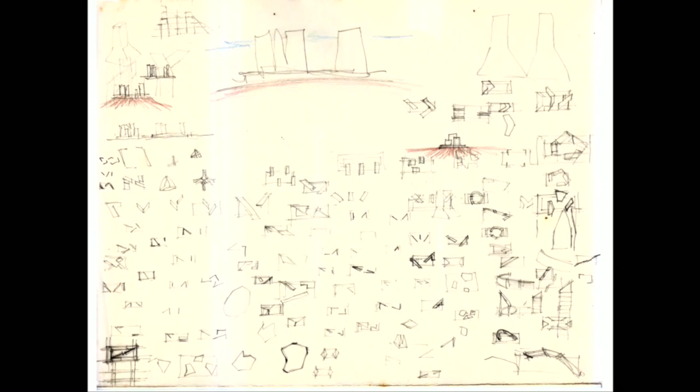And then there arises the opportunity for serenity to invade, and silence, the silence of a breeze, the silence of a deep sleep, the silence of a space. My work used to confuse me, but it was important to be confused. I sense in confusion lies the seeds of discovery of truth.

I drink from the broth of 7 or 10,000 years of my history, and I feel alive again. The myth, the mystery, the mysticism, the emotion, the philosophy, the chaos, the romance. Yes, I'm in love with the Bengali way of life. Come away with me for an hour of the Sarod and you will know what I mean. But ask me not of my work, for I create for the love of art. And ask me not of the present or the future, I know neither.

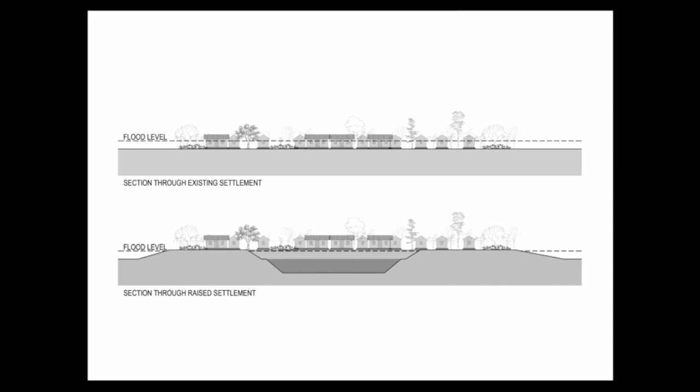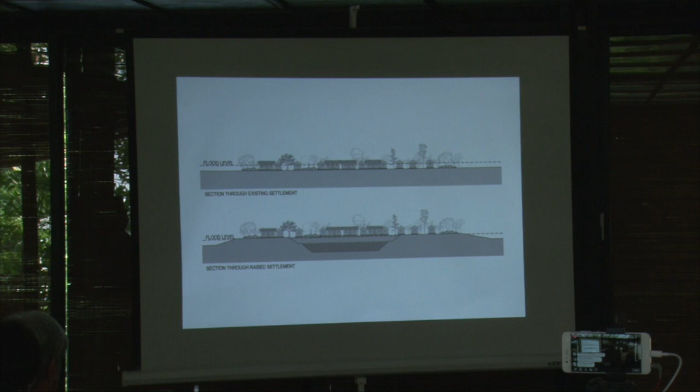The problem is these rivers are quite ferocious during the rainy season. There's a lot of water flow, and quite a lot of speed with which the water comes, so how to make something which will last and not break away very easily. So we looked at the patterns of the various sandbanks that form, and they form comet shapes because when the water comes like this, as they leave, they leave a tail.

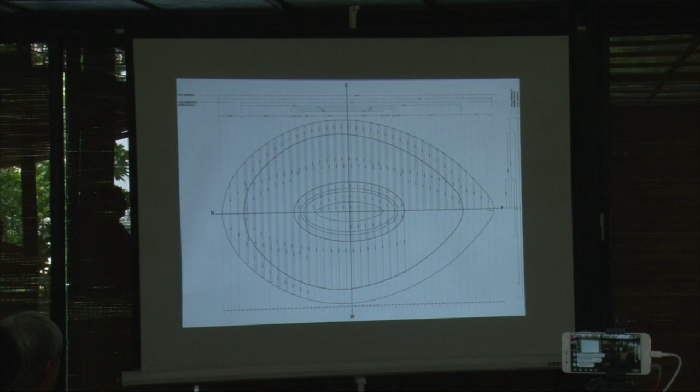So this was our proposal for the island, a teardrop-shaped island from where the water will pass like this and leave. And in the middle of the island, there would be a pond which would hold fresh water. This is basically what we came out with. We would dig here, and this would be used to raise this part and also form a sloping side, so the water would pass like this. Now it's very difficult to make a hydraulic model of this, so it was based on local knowledge and a lot of our observations from the various visits that we did.

And this is what a typical plinth would look like in the landscape in the dry season. So it was, as you say, a participatory kind of project. It was self-built, and it was also food for work, in the sense the people whose homes would be moved up onto the raised area, they are the ones who worked on the plinth itself, and they were paid to do so. And it was a very basic way of doing it, as you can see.

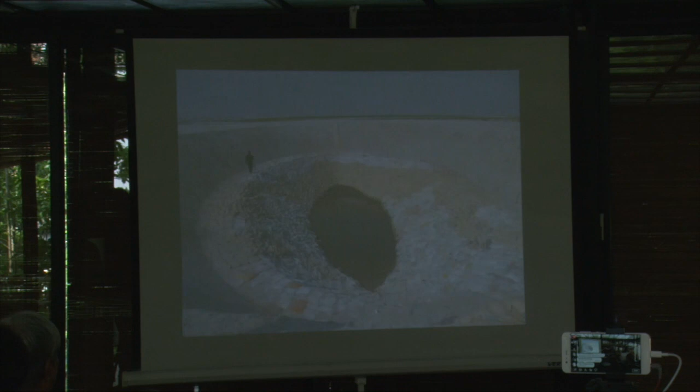So that's one of our architects working there with the villagers, giving out layouts. And then this is the pond which is being dug, which again helps to raise the main island, if you will. And then it starts to form, and green returns, and eventually life returns. A very simple solution for a very, very basic budget that we had.

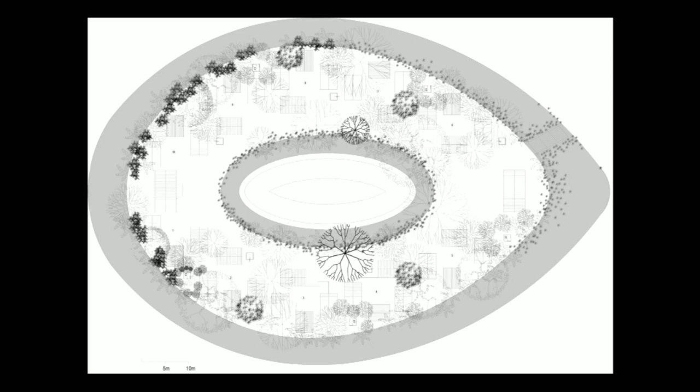Now, for the placing of the houses themselves, we did not design the houses, because the existing houses would be moved up onto this raised plinth. But we sort of mapped out how the houses could be placed, and this was based on the pattern of the placing of houses in a village. As you can see, instead of a walkway, there are courtyards which connect to another courtyard and then walk into another courtyard, and that's what we did.

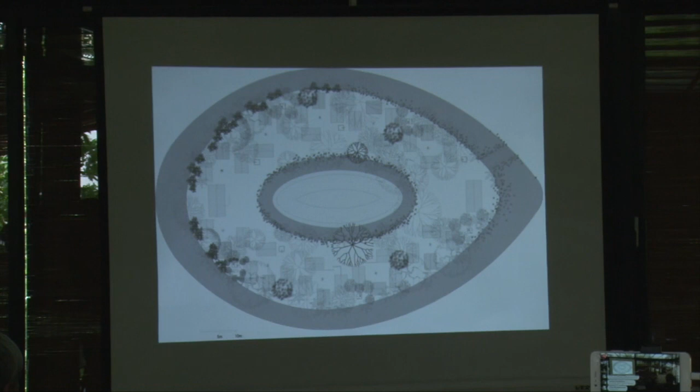And we allowed the villagers to not follow our drawing. But what was interesting, most of the time they did follow the drawing, and they said, yes, but we would like to move this house a little bit this way to get a little bit more breeze, etc. So it was, again, quite an interactive process from which, of course, we learned quite a lot.

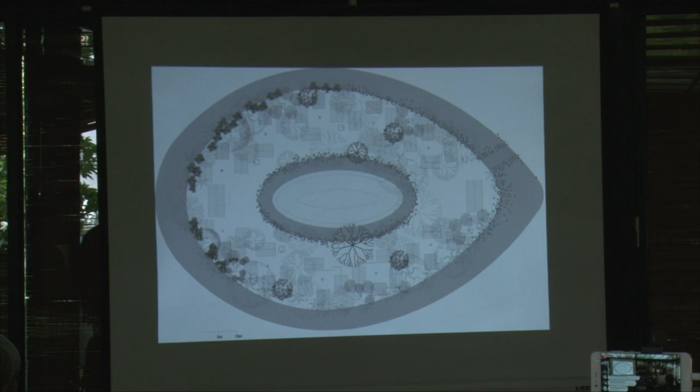And this is what it looks like in reality. So in the rainy season, you would see that all of it would be water, and this would be like an island. This is what it is, the life on the settlement.

So all around, a fierce flood is flowing, but in the center you have clean water which is harvested from the rain, and this, of course, is used for various purposes.

This is a project from 1999, 2000. This is a building I did for my mother's family. I designed and constructed it. The entire building is constructed by me, in the sense I got very much involved in the construction to understand really how it is done in a country like Bangladesh.

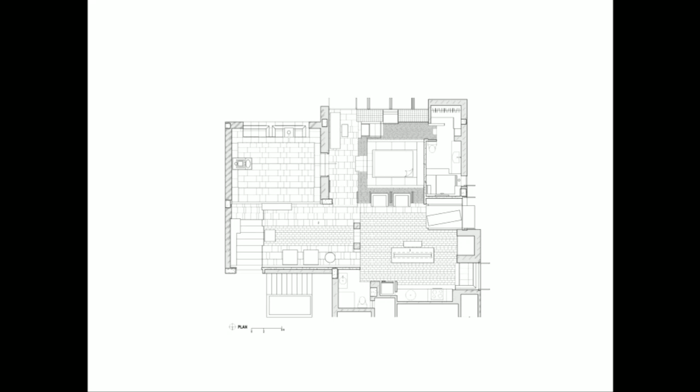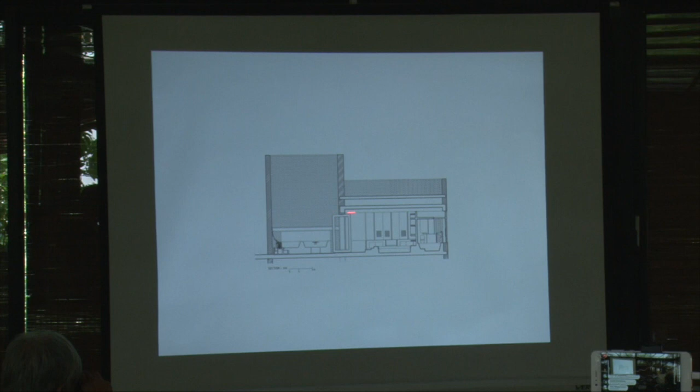But on top of it, there's a little apartment which is like a pavilion. It's open all around. It's a very small apartment. It's divided into 4 spaces. This is the courtyard, a sleeping area. This is a sitting area, and this is a dining area. And the courtyard is a tall kind of a volume. So the air from the surrounding area is drawn up like a chimney or stack effect.

This is the courtyard. Now, this is a very personal project. This is where we live. And so the detailing and the materials and the way this came about is a very personal statement, if you will. But most of the material here is recycled. For example, the stone that you see comes from a project 10 years ago. These are all reject pieces. They were lying in a warehouse, and they were used in various ways.

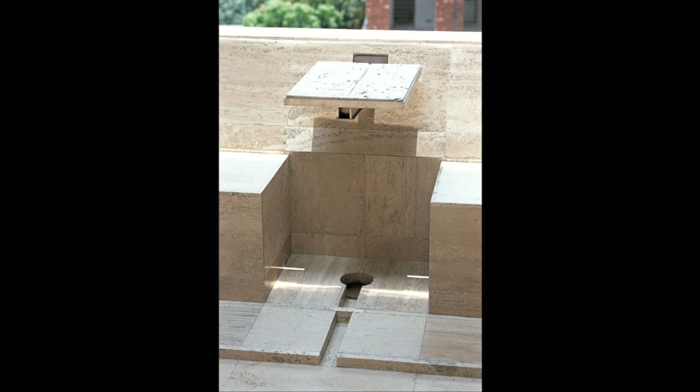So the roof of the courtyard. And then, of course, the living spaces can be darker, and what is important in a country like Bangladesh, in the tropical kind of weather, is cross ventilation, not just ventilation, but cross ventilation, so that the air is allowed to move in and out. So that is how this works. In the monsoon, for example.

Now, all the bricks that you see come from the old part of the city where they're breaking down old buildings. These are about 150-year-old bricks, and these were used in this project. So even the concrete formwork was made from the wood salvaged from the box in which the elevator of the building came. And so the various channels take the rainwater away into different areas and eventually out.

So because these were reject pieces, there were various sizes. So for example, these are larger sizes, these are smaller sizes. So every day my work was to set up these, and then the stone person would begin to lay them. The sleeping area.

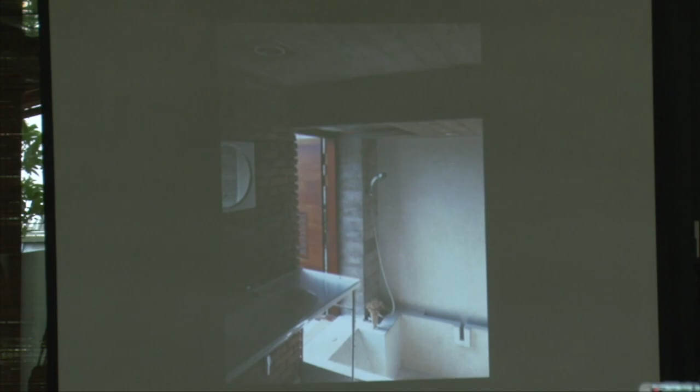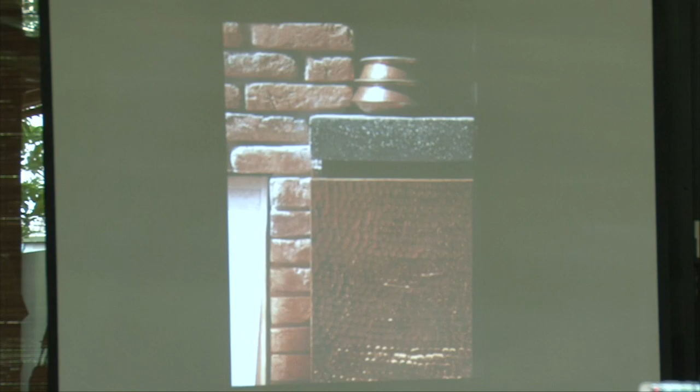Traditional copper work in the kitchen. Traditional broken china pieces in the bath area. And all, of course, naturally ventilated and naturally lit. Everything in this house, including doorknobs, hinges, everything is handmade. So various kinds of material, as I said, copper, hand-worked copper, teak. This teak comes from Chittagong, which is south of the country, and also from Burma. Concrete. So stone and the other materials.

These are the shapes, sizes we got. These are the ways we could sort of set them. We also got very thin pieces. And this is what it is at night.

In 1997, we won a national competition to design the Museum of Independence, myself and my former partner, Marina Tabassum. We worked on this project for, as you can see, quite a big part of our life actually. The reason being it's a government project and it went on and on and on. But the location of the project used to be a prominent race course. And then later during the Second World War, it was more planted, and there were other structures which came up.

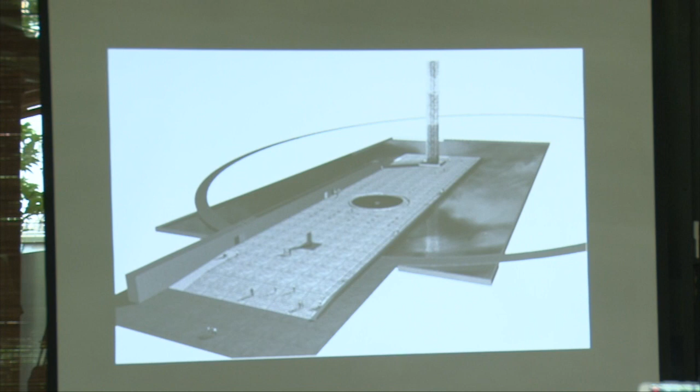There was a need for a museum and other ancillary facilities. One of the winning ideas was to have all the entire facilities below ground, so that we could preserve the horizontal sort of green character of the park. And the roof of the museum then became a public plaza, which could also hold the story of the Liberation War. Now, you might know that in 1971, Bangladesh became free from Pakistan after a 9-month-long guerrilla kind of warfare.

So people, ordinary people, farmers, people in the villages, in the cities, they fought against a fully equipped army present in the country. There are details on the internet also you can check. It was a very horrifying event. So to mark this, the project was initiated by the government. On the plaza itself, the first point is where the father of the nation gave his famous speech.

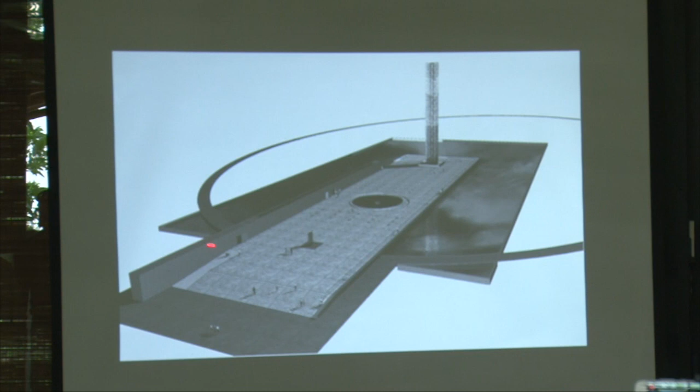And as you move towards the main monument, you encounter a very shallow pool of water with a hole in the center. It is like a black hole which draws in itself the water, and this water falls into the center of the museum below, which is the heart of the museum. So this represents the silent bearing of torture and rape and genocide by the people during those horrifying 9 months. And the only other element is a long wall which guides the visitor towards the monument itself, and this wall holds the ramp which takes the visitors below ground.

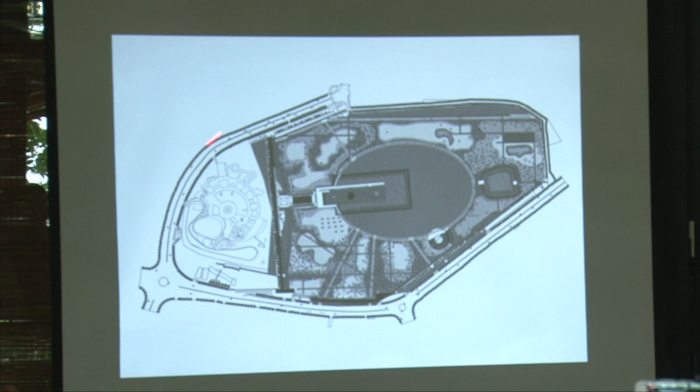This is what it is in the city. As you can see, it's a very dense city, and our idea, of course, was to preserve the openness as much as possible. So the only thing that is there is a large public plaza above ground. Again, the entire 67 acres of land is green, and just this part is the plaza area, and beneath it, the museum itself. The museum is again very simply lit. At the heart of it is a kind of rotunda space which has no display, and in this falls the water from above.

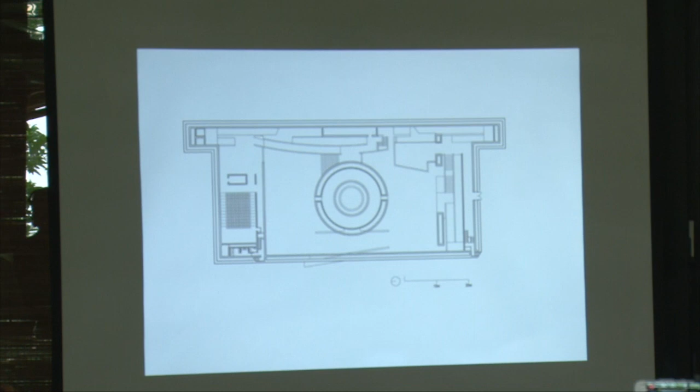Now I don't know how many students there are, but I'm showing this slide to say, well, this is my thesis project in the final year, and that is what was built in the museum. So as you can see, this was again in the center. I was working on this circle which brings the entire world together, and an open space where everybody could come. This is a cultural center, and here again this becomes repeated.

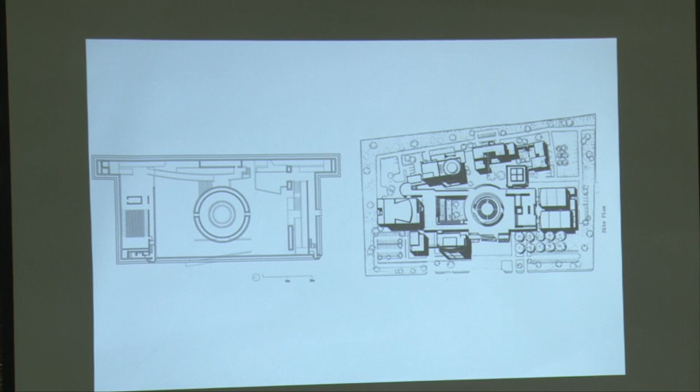And what is to say for students is really whatever exercises you do in whichever year, it really stays with you. So I guess one needs to be quite careful and invest a lot of time and energy into each and every one of those projects that you do, even as a student, because they're with you for the rest of your life.

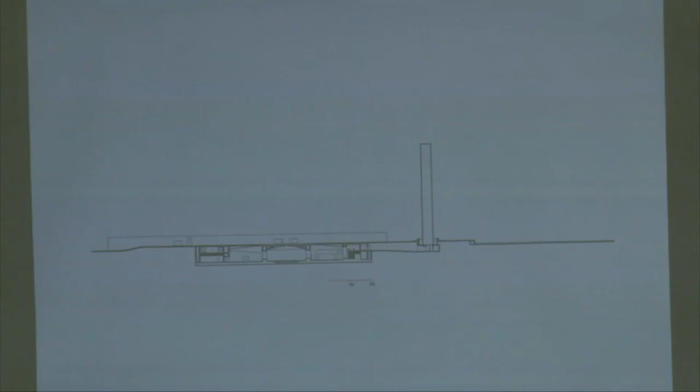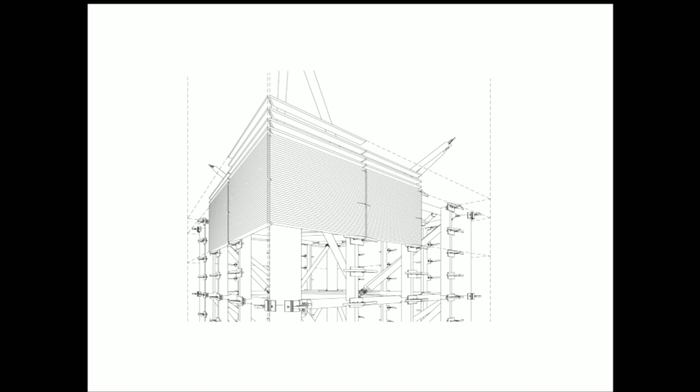The glass is not set like this, as you ordinarily see. It is set like this, which means the property of refraction is used as opposed to reflection. So it is stacked glass, 19 mil by 75, formed into prefab panels, which goes into this vertical space frame. And this, of course, harkens back to the thousands of years of our heritage of laying brick one above the other. And so the staggered glass has a certain materiality to it, a certain strength to it, and that is what we were interested in.

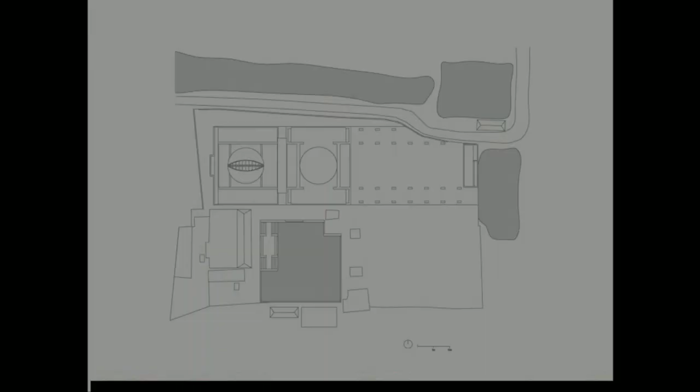The mosque is in the port city of Chittagong. The sponsors of the mosque wanted to build it and give it to the community. For us, it was important to not look at the mosque only as a religious space, but more as a spiritual space, and to think if it could also become a kind of place where the community can gather. So it essentially consists of two simple volumes, two cuboid volumes, one the mosque proper, and the other one as the courtyard.

So the courtyard is again given a form, so it is a kind of reception volume for the main mosque itself. This is the section to which I will come back later. So it is in the peri-urban area, and it connects both communities, the urban communities as well as somewhat rural communities.

And the front block, which is the courtyard, links the nature, the horizontality, with the vertical. And the horizontal represents our life on earth, our connection to nature, to other people, and this as spiritual, our connection to Zenith. So everywhere there's connection to nature, as I said, and views of it, views to the community, to the surrounding areas.

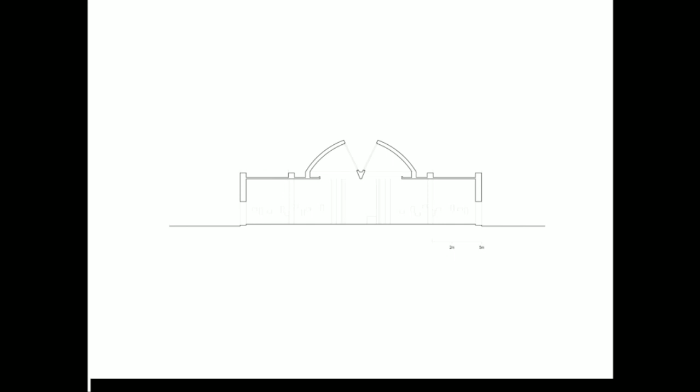So we cut up the dome to express the fact that this is a non-structural element, and then it brought in light, and it also took out light at night. During the day, and at night.

So the idea of this as an accentuating element is again more pronounced.

We did another mosque again in Chittagong, in the port city of Chittagong, but here we found an old building, an old mosque, about 200 years old. And although the owners were in two minds of keeping it because it was falling apart, we sort of restored it with the help of other experts. And this became the starting point, the generator of our design.

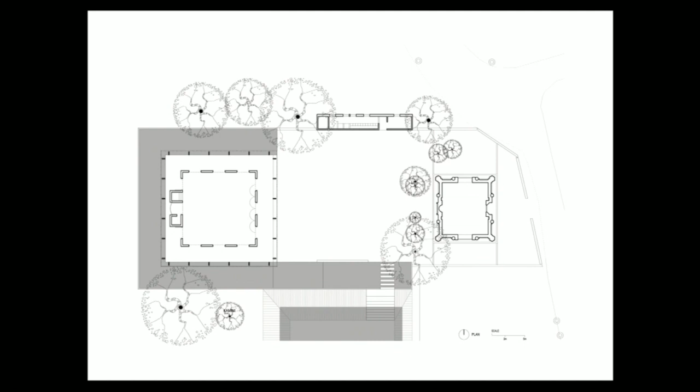So this is the old mosque, which is in the front, on the roadside. And we designed the new mosque, and not a big one, at the back. Now the owners, or the sponsors of this again wanted a large structure, and we fought to say that it should really not be a big one. It should have some link in terms of proportion and in terms of visual connection to the old one. And so the past comes to the fore and the new goes to the back.

A very simple volume with a main prayer space and veranda all around. Here, moving away from this idea of ornament, the banishing of ornament in modernism, I knew that the geometry in Islamic architecture was important. And this was brought in, but only in the ceiling. So you see it as you go in and you look up. Elsewhere, it is plain. And this is the roof structure which sort of generates that geometry.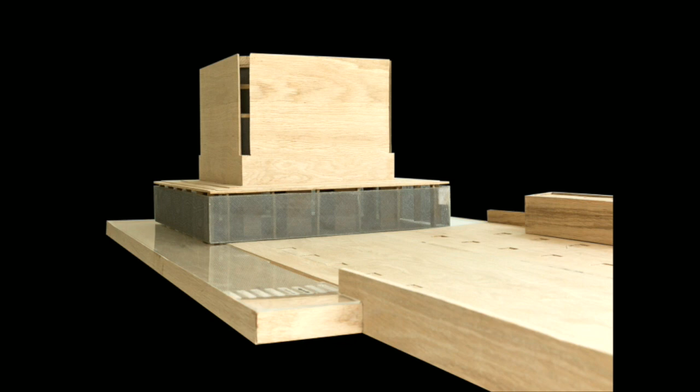We borrowed an element from the old mosque, which is a kind of a grill. And this was turned into a cast iron grill, which wrapped the new structure. And so this is what it became. Now, again, these people, my clients, they wanted a dome. And again, this discussion started.

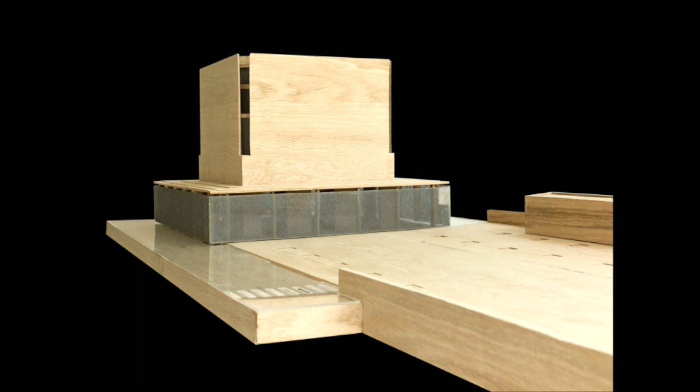So again, the idea of accentuating the dome, which is a circular element, now became a cuboid element. Again, announcing that it is not an ordinary building, it is not a school or a house, but it allowed for air and light to come in as well. And of course, the various geometric patterns in the ceiling cast itself on the floor. This is what it is. It's a simple concrete structure cast in wood.

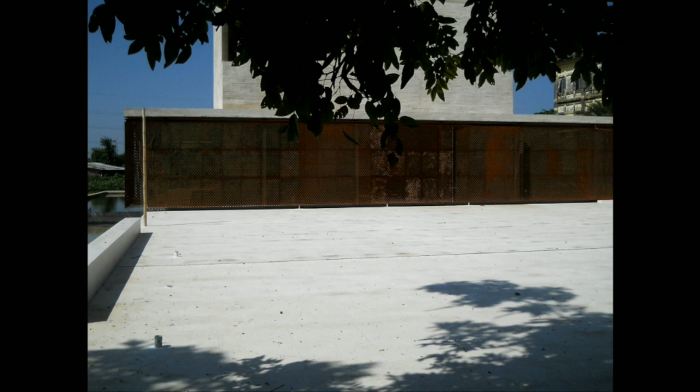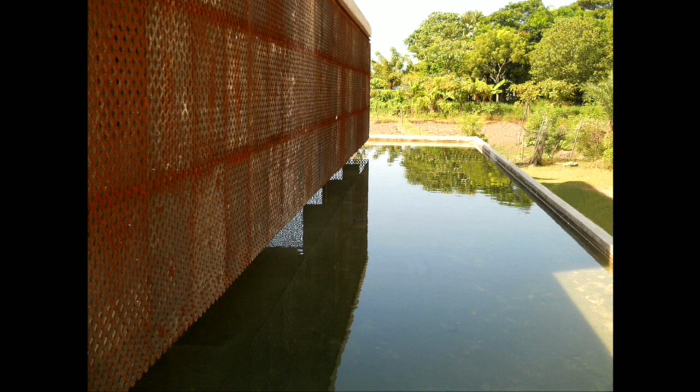And the veranda is wrapped with this cast iron grill, the pattern of which is inspired from the old building, from some of the geometric shapes in the old building, and it is hung. So it does not touch the ground, it is made light. This heavy sort of curtain is made light by not touching the ground, and it floats on water.

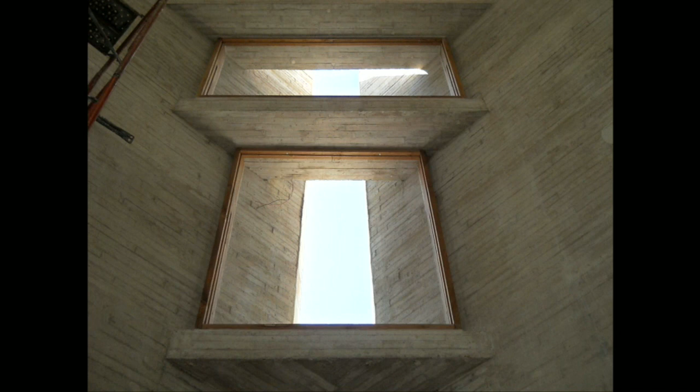The ceiling, as you go inside, and in the corners, the light comes in. And the casting of the concrete sort of corresponds to the wood in the doorway and other areas. And this is the veranda, which does not touch or does not come down to the ground.

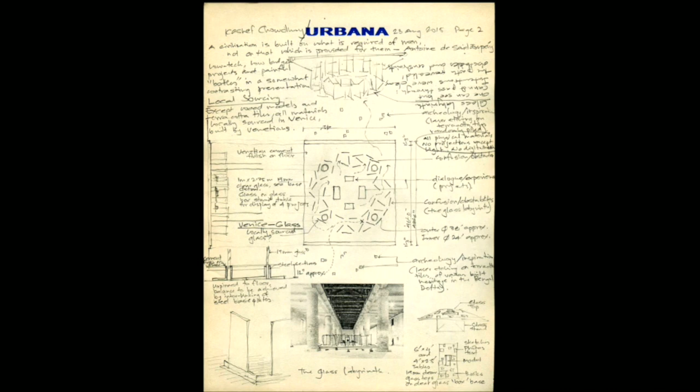The idea was a labyrinth to express that whatever we try to do, it is not easy to do. We go through various processes, and it is almost like going through a labyrinth. And then as we pass the labyrinth, we go into an inner space where the various projects are displayed. So here, 4 projects are displayed, 3 of which deal with climate change, the projects that we had done.

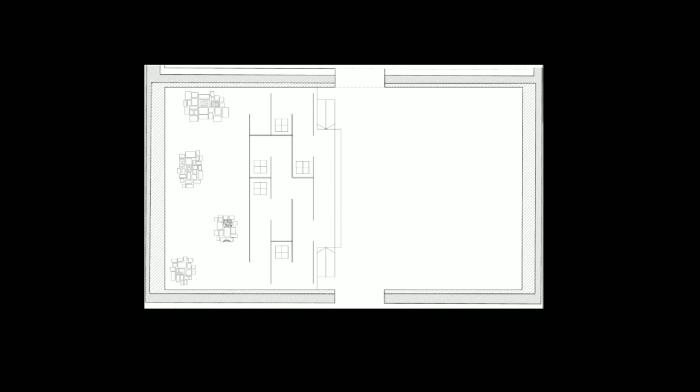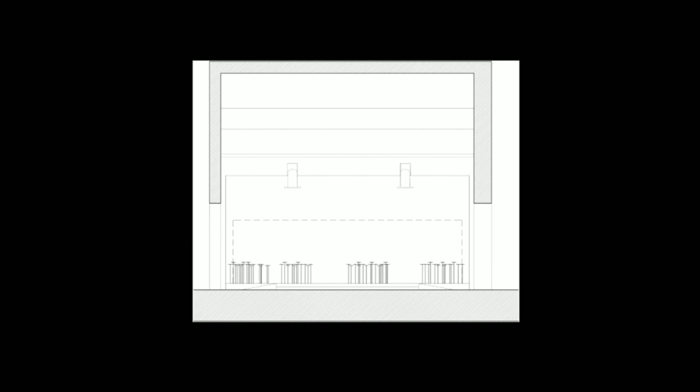One of the things that we did is to turn the idea of labyrinth, which is an architectural sort of element which has been going through history again and again, but we turned it in a way because the labyrinth is made of glass, which means you see it, but you cannot go through.

And as you move through the labyrinth itself, you encounter various terracotta plaques or tiles on which are etched drawings of old buildings, which sort of inspire us, which sort of guide us to our new models and buildings that we do. And so again, this is a kind of reversal of processes: thousands of years old technology of making handmade tiles with a laser imprint on them.

And as one goes inside, one goes into the kind of inner landscape. Now here, the various projects are displayed on these thin rods. These are like plants. The idea is to express that our projects take time to grow. We have calculated that it takes an average of 7 years for us to complete a project in our office. It takes a lot of patience. It's definitely not advertisement. It's much slower than that. So it is like tending to a plant. So they grow slowly, and that was one of the ideas for the various projects to be displayed.

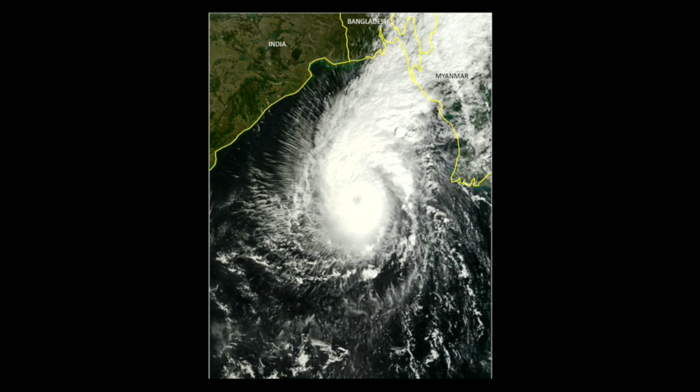And the cyclones usually form here in the Bay of Bengal. Instead of moving towards Thailand, it moves up towards Bangladesh. And when it makes landfall, it causes huge destruction. And this is a satellite image of that cyclone of 2007. And this is what happened.

It took away the lives of more than 10,000 people, innumerable animal lives, damages of at least $1.7 billion. And as you can see, there were wind speeds of 260 kilometers per hour. I was in Dhaka on the night when this happened. The next morning, of course, one heard the reports, and some of my friends who are photographers and journalists were sending back what they were seeing, and it was, of course, horror.

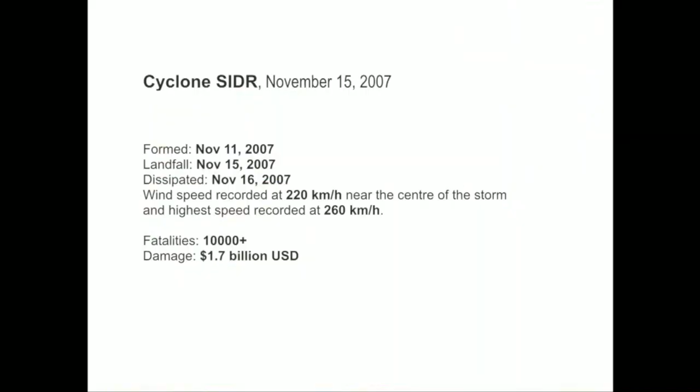And I decided that I didn't want to be in my studio comfortable like this, but to be there, at least to be with them, and to see what was happening. So myself and 3 of my colleagues, we went to that area. We took a boat. We were on the boat for 5 days, and we traced the path of the cyclone as it made landfall. So the cyclone came in like this.

And so try to imagine that the cyclone struck at midnight. It's all dark. The power had been cut for safety. The wind speed is 260 kilometers per hour. Tidal surge has come in to 7 meters high. Where you are standing, it's above 7 meters. So it's like an inland sea. You don't see anything. You just hear the howling of the wind, and the water is, of course, very, very choppy.

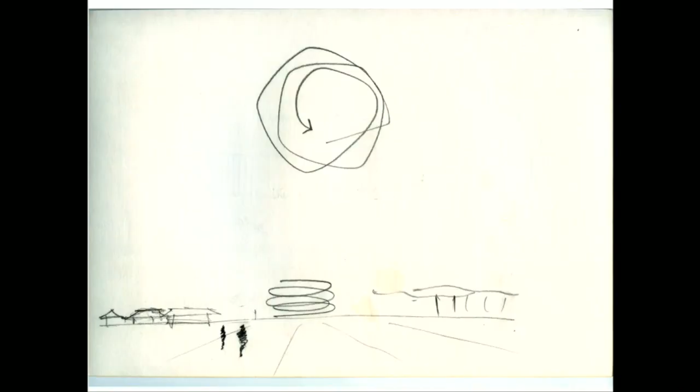Now, of course, in Bangladesh, there are many cyclone shelters, at least 2,500, including those from the government and other NGOs, and it saves millions of lives every time there's a cyclone. But based on our own experience, on our own observations, we thought we could make some changes to the existing models. And this was the first sketch.

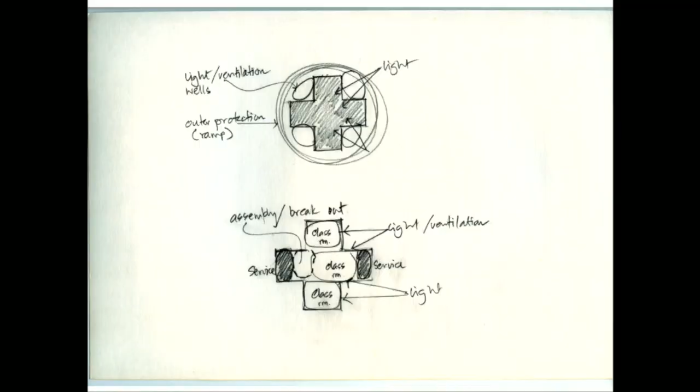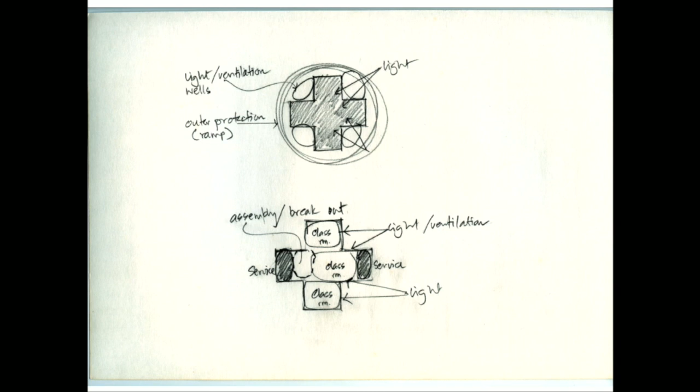The idea was to make a kind of a cruciform-shaped building and then protect it with a ramp. And with the ramp, immediately you would have light wells and ventilation wells in the 4 corners. And the ramp could then also protect the inner structure from high wind and hydraulic pressure. This is the plan. As I said, very simply done.

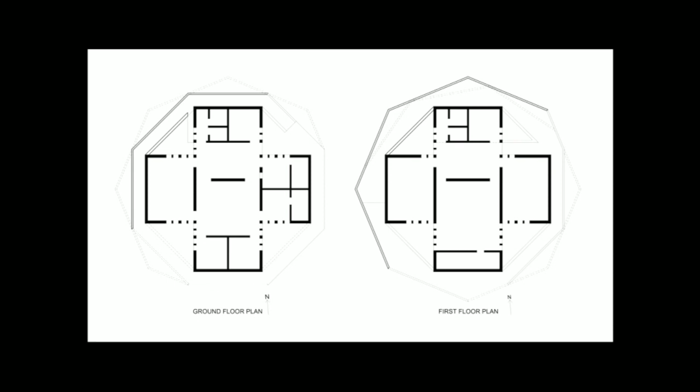During normal times, it would be used as a school and a clinic. So the upper floor is a school, 3 classrooms, 2 shifts up to class 5. And on the ground floor is a clinic, which also has X-ray and other diagnostic facilities. But the entire structure is protected by a ramp. And the entire structure is of concrete. Now, why these 2 factors?

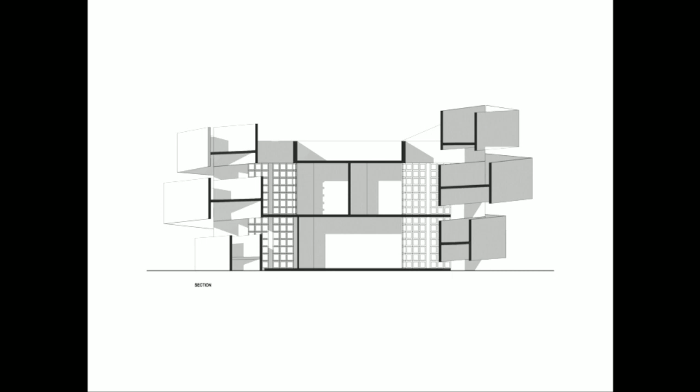First of all, during a cyclone, there is flying debris. Everything is flying, from cows to trees to branches to tins, and it's very dangerous. So the building is protected by the ramps. And in normal standard cyclone shelters, there are ordinary glasses and windows, which means the glasses break, and it is very difficult for people to take in all the sound and the high wind that comes in. So our windows are made smaller and protected because they are in concrete niches.

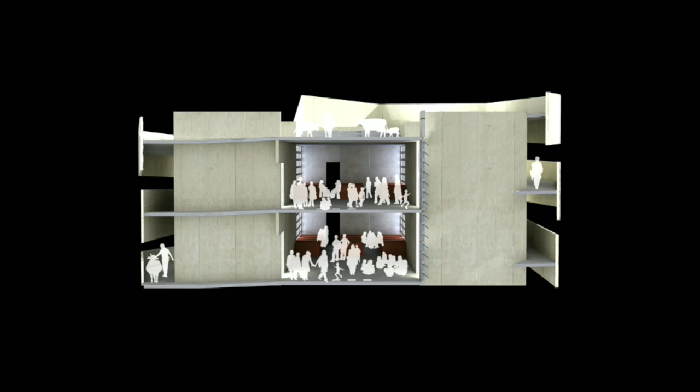This is what would happen in a normal situation. But during the cyclone, people can gather in large numbers because the ceiling height is more. And most importantly, they can take the cattle up to the roof. This is what we learned, because during a cyclone, they don't like to leave behind their cattle, because they may die or be lost. So to have some place for them on the roof, they could at least be saved from tidal waves. These are some of the renders.

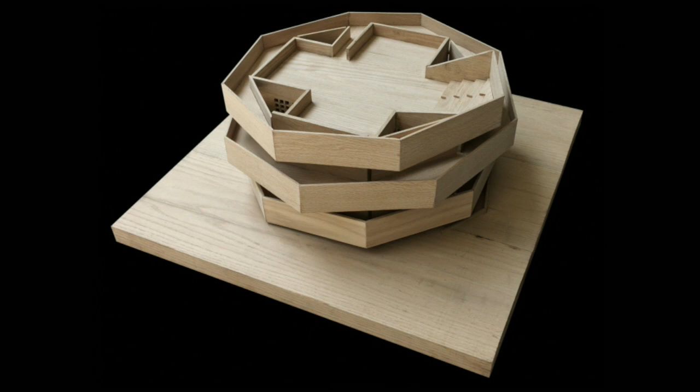It was important to make it in concrete. The existing structures are brick and concrete, which don't last in the saline sea kind of weather. So this was all concrete. But in terms of budget, we tried to optimize the costs. And from the photographs we took and the stories that we had, we made a little booklet to raise funds to make one prototype of this design. And we failed. We could not raise enough money after trying for 5 years.

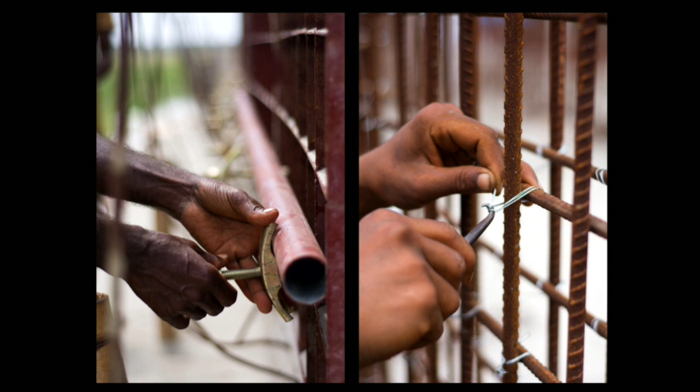And then there was a group from Luxembourg who thought this idea was interesting, and they took one of my exhibitions to Luxembourg. This is at the foundation of the Institute of Architects in Luxembourg. They made this exhibition, and the cyclone shelter, of course, was on exhibit, and happily we were able to raise funds for one project. And then, after almost 7, 8 years of trying, we started construction near the Bay of Bengal. It is under construction. It's nearly finishing now.

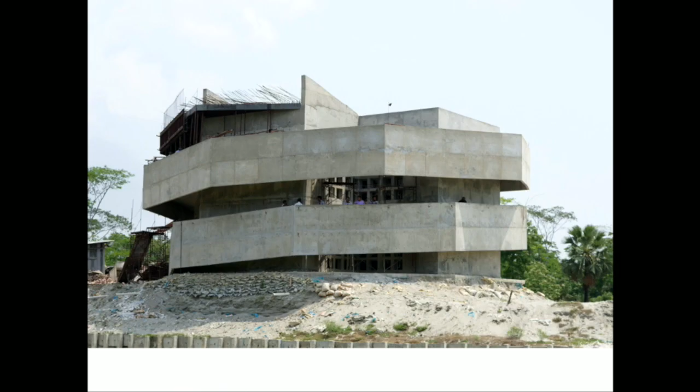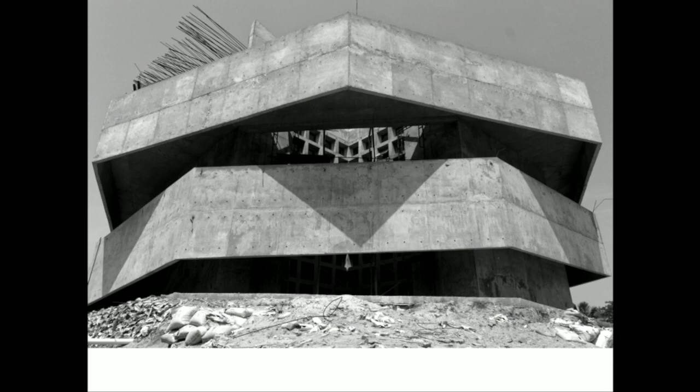So these are a little bit older images in the landscape. This is what it looks like somewhat. It's not finished. So this is an actual image of the ramp going up. And the ramp twists as it moves up. This is in the landscape. It was important to have this as a marker because in rural Bangladesh, there are hardly any postcodes or road numbers. So it is by word of mouth that people will come to know that there is a cyclone shelter there. So it was important that it quickly becomes known as a different kind of a building.

And we made a design which I showed to the client, which we were very happy with, and the client was very happy with. And when we did the cost estimates, we realized that we were losing almost the entire budget just trying to raise the project. So it was costing us double the amount we had at that moment. And so we had to go back to the drawing board, and there was no way we could make this within the limited budget we had.

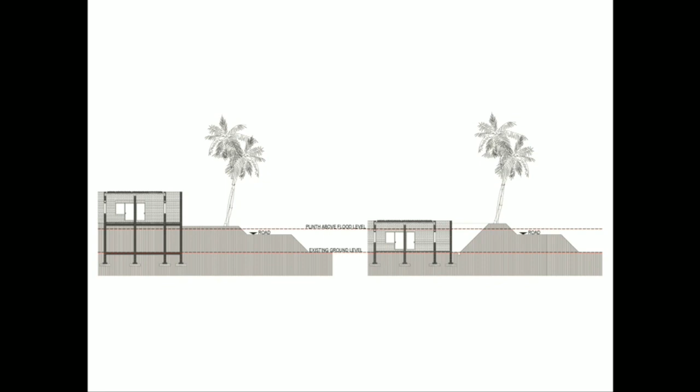We have examples of this from a town called Mahasthangarh from the 3rd century BC, where the same kind of embankment had been used. We have only ruins of that settlement, but one was inspired by that or took a clue from that to try to take the challenge of making it within the limited budget that we had.

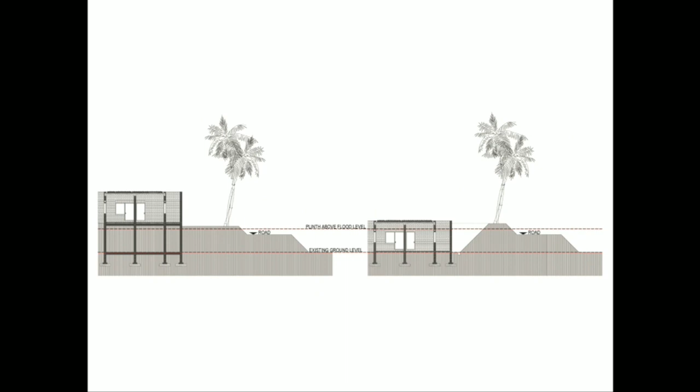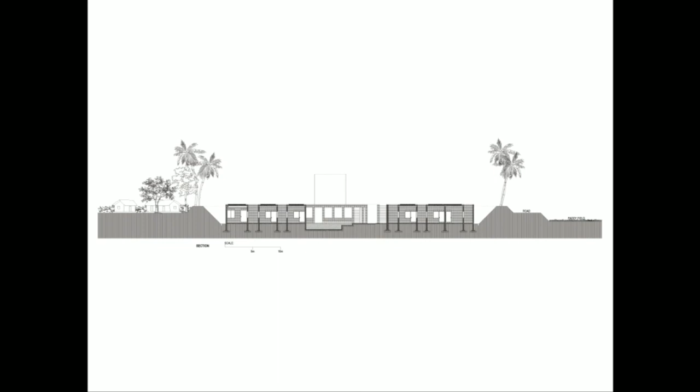With that came the attendant problem of rainwater getting collected within the areas of the embankment, and we of course introduced a series of tanks and pools to collect the rainwater and harvest the rain. And we also introduced large tanks to hold sewage because we didn't want it to contaminate the flood water.

So this is what it is, 2 blocks. The first block is the learning area, and the second block is the residential area, both centered around community spaces. The first is a reception pavilion around which are the classrooms or the discussion rooms, and here is a dining pavilion around which are the various dormitories and residential quarters.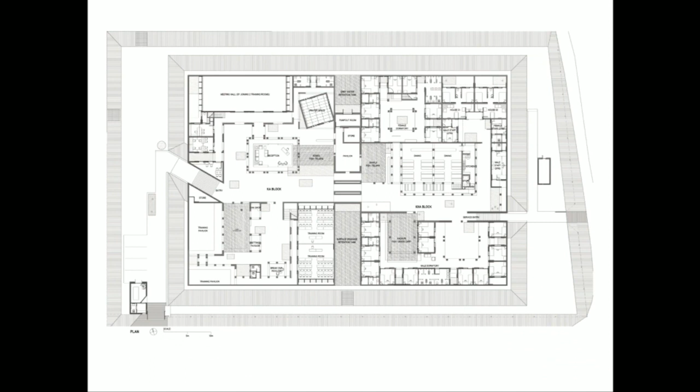The entire complex is in a rural agricultural area, and it was very important to relate to that as well. But the thermal mass, which is the earth on the roof, helps to lower the temperature in the insides, and therefore we can obviate the need for air conditioning even during hot summer months.

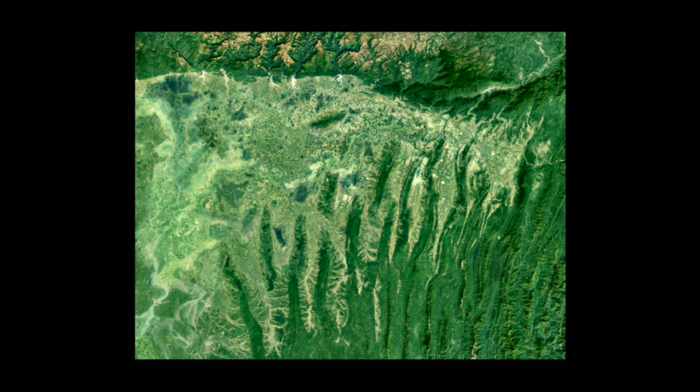This is under construction. It is in the northeast of the country in an area called Sylhet. It is close to India. All around is India, and here is our project. It is kind of an undulating terrain, very wet. The wettest place on earth is very close to here, so a lot of rain and very green. And also there are very beautiful estuaries and wetlands all around.

So this is the site. We enter through here, and as you can see, all of it is paddy fields and almost forest-like trees and growth. We chose 3 areas. Instead of having one large building, we separated them. This is phase 1. There would be more things coming up, but this is a sculpture park. So we thought it is interesting to break up the various functions so that people would walk from one area to the other and enjoy the various artworks on display in the landscape.

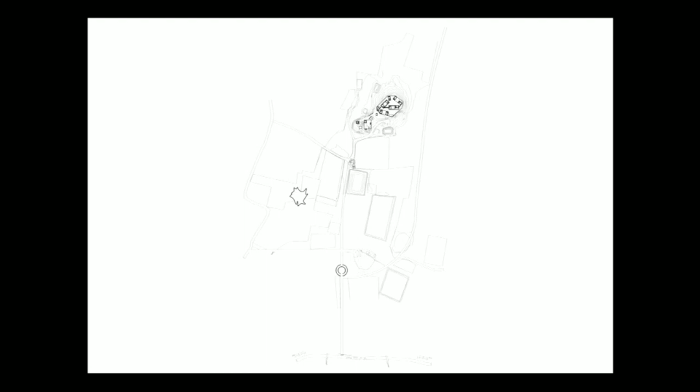So this would be the first structure as one comes in. This is an art gallery, and this is the artist's residence. This would be a residency program where artists would come and live. So the entry structure is really a space trap. So space does not flow directly in or out. So there's a kind of a trap which one comes in, gets dropped off, and then walks inside, or uses a small buggy to go in. Local handmade bricks.

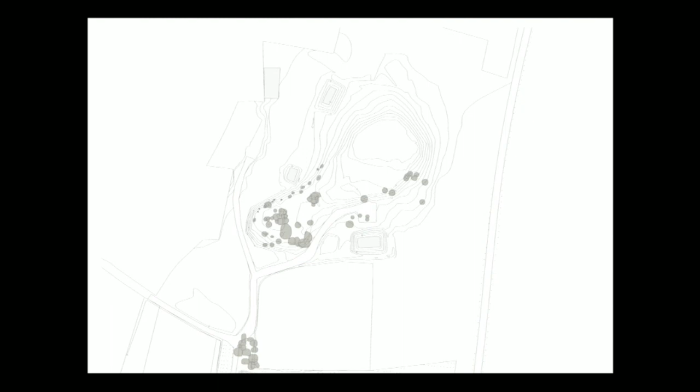So from the entry structure, one goes inside into the inner landscape and then into an area where the artist's residence would be. We chose a small hillock for the artist's houses. One part was very much wooded with a lot of thick bamboo overgrowth, and the other area was open. So this is the area we chose for the houses themselves, and in it we inserted the dining pavilion.

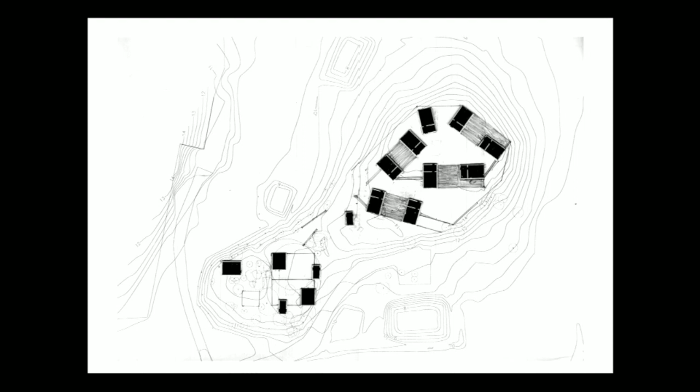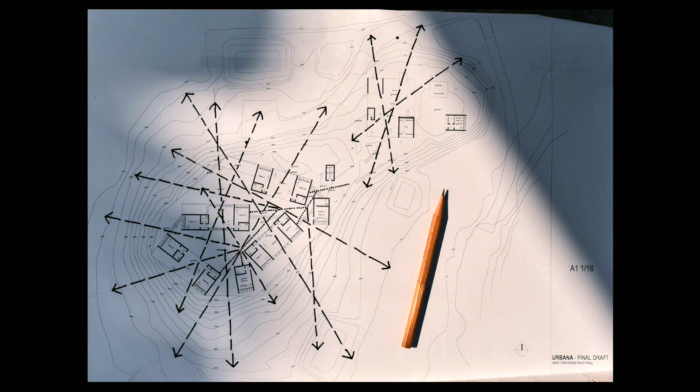And we made the houses individual, and we played around to see how we could place them in the landscape, to see how it sets into the topography and also connect to the various views. And we came up with something like this, and then onto this, because for me these curated views out were very important. And this is the final layout. The houses here, the dining pavilion here, another house here. And very simple, again almost monastic.

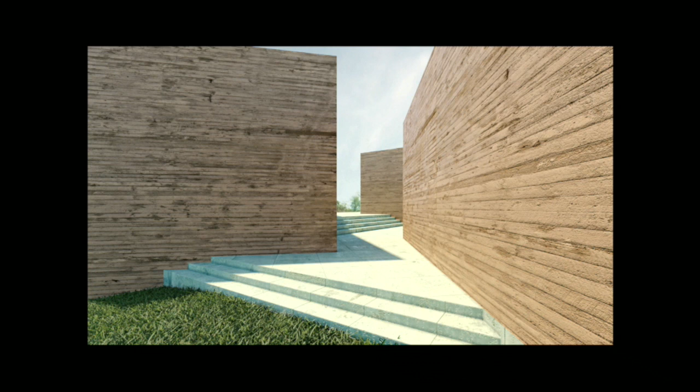This is built of concrete cast in wood. The concrete takes the color of the earth. The earth here is reddish yellow. It takes the color of the earth, and we use a grayish green stone which merges with the rest of the green. Various houses of the artists. As I said, some views out onto the landscape where the various sculptures and installations will be.

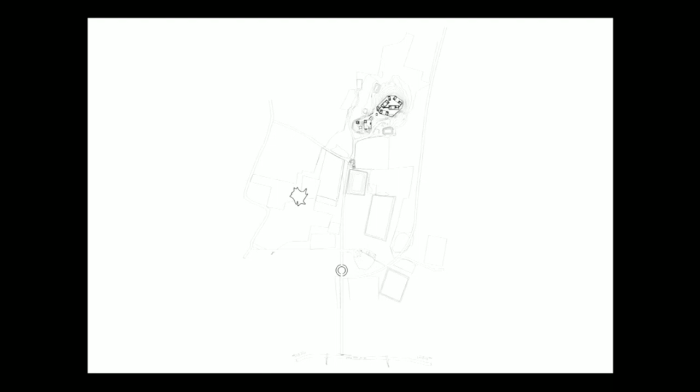For the last structure, the gallery, the curator said we needed a black box, you know, how it is today. They want a black box or a white cube where they can make things on their own. And this was the dimension they wanted, and said, don't worry about this, we'll make it. You don't have to do anything about it. And of course, I realized this is going to be a disaster. So the moment the meeting ended, I drew this. I said, we have to do something about it.

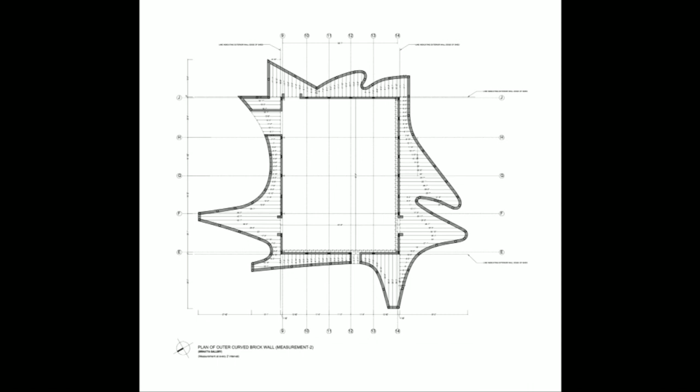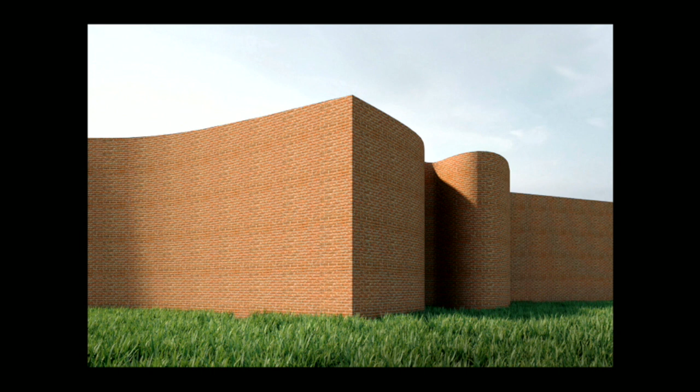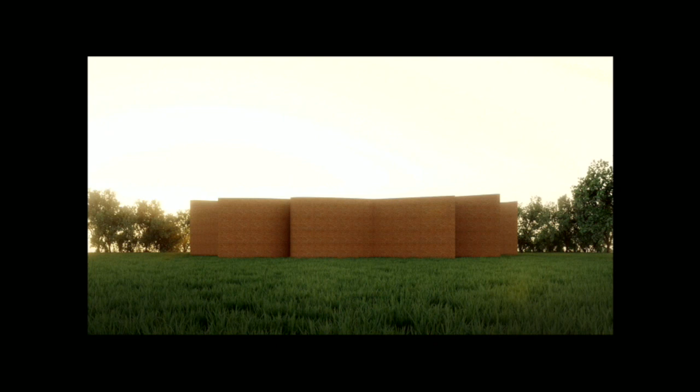And this quickly, in a few hours, became this. And then, of course, this is what we are making. It's under construction. This is to be finished before the end of this year. And it's set in the paddy field. Agriculture continues. Made of local handmade bricks. And the space in between the curved walls and the main black box, so to speak, we are using those spaces for the various installations and artworks.